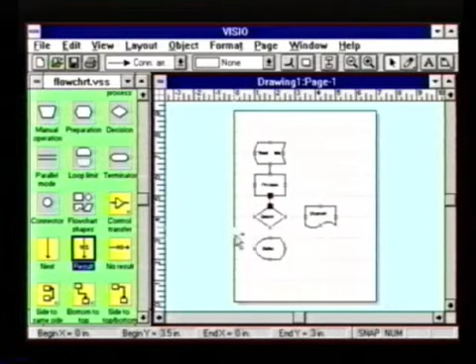I use the same technique to drag connector lines between the shapes. When I drag a connector over, it snaps to a shape, but more importantly, it glues to the shape. So if I move it, the connector moves with it. I don't have to redraw the line.

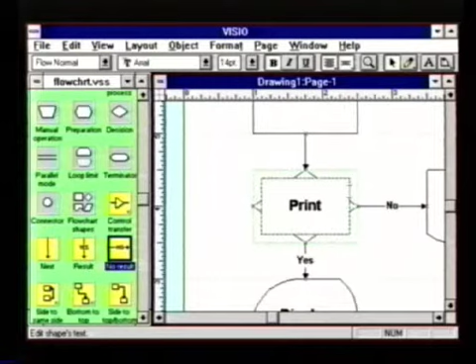Let's zoom in on the decision diamond by clicking on it and using the zoom button on the toolbar. To add text, I simply start typing. To do this with many other products, you have to use a separate text tool, create a separate text block, and then combine it with whatever shapes you had there. But with Visio, it's intuitive.

You don't change tools, don't hold down modifier keys, you just click and type. And when you're typing, the toolbar changes to look like that of a typical Windows word processor and provides similar control over text. Well, not only shapes can have text, lines can too. You can see coming out of our decision diamond we have connectors with text. Just clicking the item and typing works for a connector, just like it works for a shape. I'll just quickly finish this up.

The Visio developers wanted to free you from the complicated process of changing tools or modes. You don't have to go to a separate text tool to enter text. You don't have to go to a separate drag tool or draw tool to move shapes. This consistency of operation is one of Visio's strongest points.

There, my drawing's done, but I really haven't drawn anything. I've just dragged and dropped these shapes onto the page. You may be wondering, can you really draw with Visio? Well, of course you can. Up on Visio's toolbar, we have a straightforward set of drawing tools.

Let me take the line tool. I use the same tool to draw a straight line or a polyline, or if I keep going, a polygon. In this case, I'm drawing a big bold arrow. It's too big, so let's resize it.

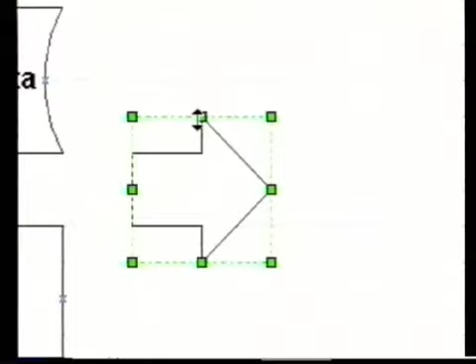Here's a problem you run into with most drawing products. When you draw polygons, they behave like boxes with 8 sizing handles. This is not always useful. But with Visio, I can take any object and make it not behave like a box, but instead behave like a line. And when it behaves like a line, I can use it like a connector, including the glue feature we mentioned earlier.

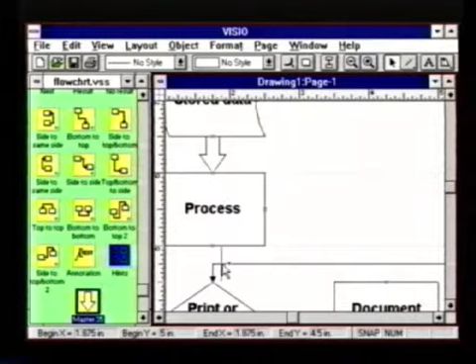Having drawn that arrow once, I don't want to draw it again, so I can drag it back over to the stencil. Draw it once, use it over and over again. That really saves time. Here's another way Visio is easy to use.

On a recent trip to Washington, D.C., I started making an organization chart of the President's Cabinet. You might not buy Visio specifically to do organization charts, but then you find you want to create one. Visio lets you quickly create that chart using the same drag and drop technique we used with the flow chart.

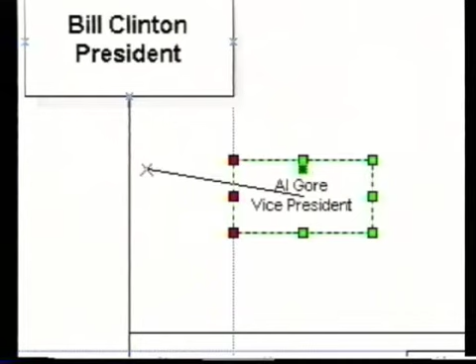You may have noticed I didn't use separate connectors. Instead, I dragged a connector out of the shape using these green and gray boxes we call control handles. Control handles are hotspots attached to shapes that make them more flexible and useful. The org chart shapes, like all of the shapes that come with Visio, are more than just dumb clip art. We call them smart shapes. Visio's flexibility lets you easily keep up with dynamic situations.

Here are some flowcharts and org charts easily created with Visio.

So I succeeded in making Visio easy to use with drag and drop, click and type, consistency of use, and smart shapes that behave the way you expect. But don't just take our word for it. Here's what some users have had to say about Visio. John Shulo of Northeast Utilities said, Visio's strongest point is its ease of use. Industry analyst Andy Seybold said, I have never seen this much power and diversity incorporated into one so easy-to-use package. But ease of use was only one of the three challenges.

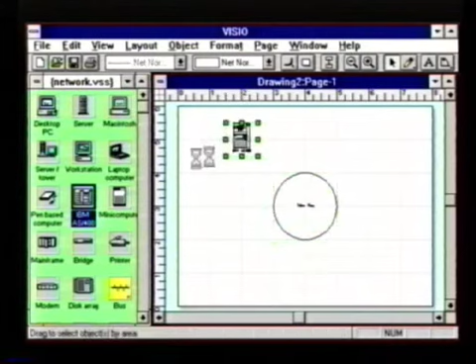The second challenge was breadth. To be truly useful, Visio had to easily create a range of business drawings. We gave Visio breadth by creating a graphics engine capable of addressing the needs of a range of drawing and diagramming types. A network diagram is a good example of breadth because a number of our customers tell us they were a real problem before Visio. To create drawings like this, you had to use a hodgepodge of graphics programs, CAD programs, illustration programs, specialty tools, even presentation products, whatever could be pressed into service, often with time-consuming, frustrating, and unsatisfactory results.

But with Visio's powerful engine, you use the same procedures to create a network diagram as you use to create an org chart. And like those pull-out connectors we used in the org chart, we have pull-out connectors in the token ring symbol. And of course, they stay glued to the shapes. So if I move my server shape, everything stays connected.

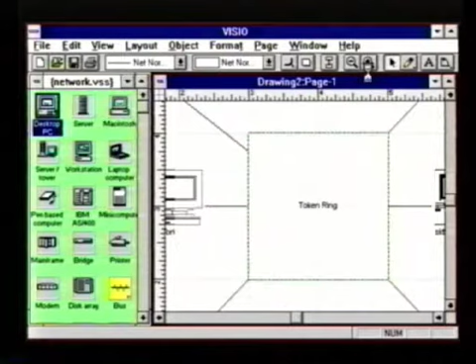With Visio, you use just one application to create multiple drawing types. You know the advantage of supporting one graphics product throughout a company. You're not supporting a flow charter here, an org charter there, a space planner here, and so on. Visio is a great value when compared to the alternatives. Visio is easier to learn and does more types of drawings. Plus, because Visio is targeted at broad, mainstream usage, we made it inexpensive.

Finished. Here are a couple examples of network diagrams created with Visio.

What if you want to take on a task that seems very different, a measured office layout? Well, if you've already created a Visio drawing, such as a flowchart or a network diagram, you already know how to make an office layout. Let's start by setting out the walls of the office. You can see that our rulers are marked off in feet and inches. It could as easily be centimeters or meters. As I size shapes, there's a readout of their dimension at the bottom of the window.

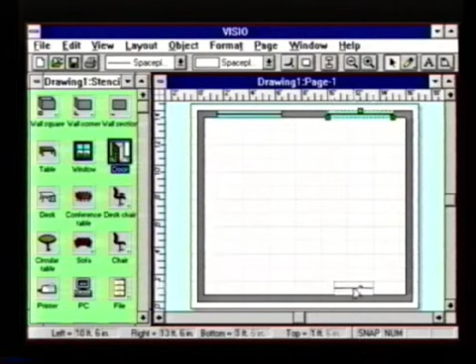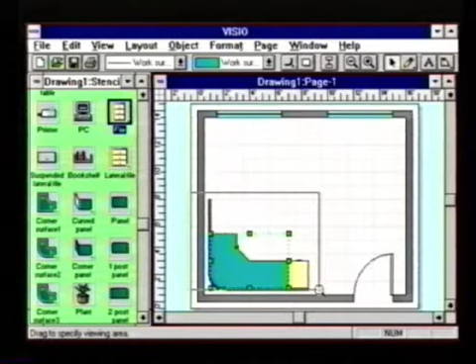Now, to accurately determine how many workstations we can put in this office, the application must work with the real sizes of objects. Visio has that capability. For example, this drawing is set up with a scale of 1/4 inch equals 1 foot. When I drag and drop Visio shapes into this drawing, they are the correct size at that scale. This is a Visio feature usually only available in complex CAD systems, but you don't find it in illustration programs or specialty flow charting tools or org charting programs or products like them.

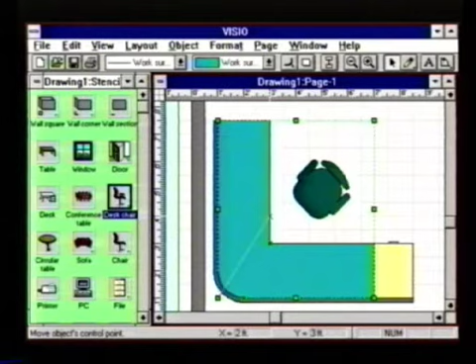We've seen smart shapes before. Here, when I stretch the desk, it doesn't distort. It knows I want to extend the return and not widen the entire piece. In other words, it behaves the way I expect. I can just grab this control handle and change the desk from having a keyboard tray to not having one at all. And here, the control handle pulls out the drawer of the file cabinet to make sure I've left enough room.

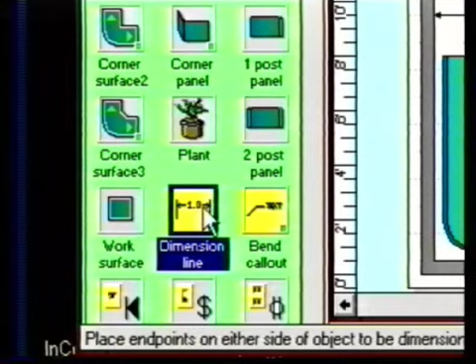In making drawing easy, we don't think it's an issue of how much dumb clip art you have, but how few smart shapes you need. Now, no measured drawing would be complete unless it could do measurements, and Visio can. And no office would be complete without a plant, and Visio can do that too.

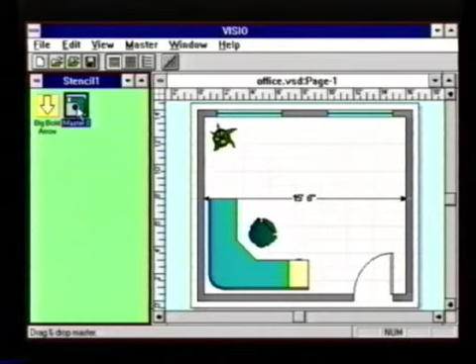Space planning is just one of the 20 general business stencils that come with Visio. But if your needs are more specialized, for example, electrical engineering, or chemistry, or biotechnology, or even law enforcement, we have additional stencils available. But what if you need shapes specific to your organization? Just make your own stencil. I demonstrated before how you can drag a shape over to the stencil and then use it over and over again. You can create your own stencils of shapes from scratch or modify the Visio shapes that come with the package. You don't have to wait for an upgrade from us to grow. Visio is open for you to customize to your own needs.

So we met the breadth challenge by providing an engine that supports a range of job-specific templates and custom templates created by you. But there was still one more challenge left to meet.

We're wearing sunglasses here because we need to hide from our marketing people. They tell us never to demo the hidden part of Visio, its power.

It's true, most users will never use this part of Visio, but it's the power under the hood that enables it to grow with you and integrate well with your other Windows applications.

Remember the arrow we drew earlier? If I stretch that arrow, the arrowhead distorts. It's dumb. But I can make that arrow smart, so if I stretch it, the arrowhead stays well proportioned.

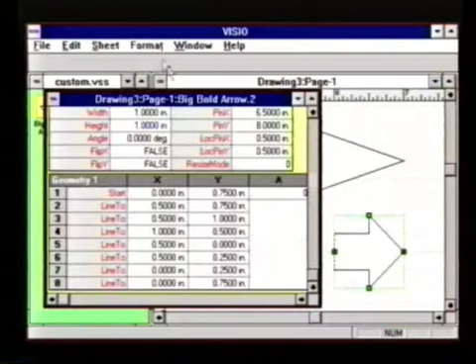To provide this capability, under every shape is a shape sheet, a spreadsheet that's not just a table of values, but a table of formulas. I'm going to change a few formulas to make this arrow smart.

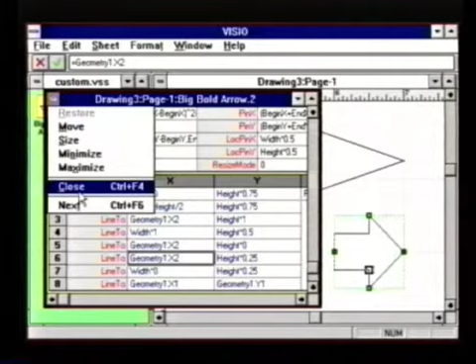You don't have to do this because the shapes that come with Visio are already smart. But if you're an advanced user, this capability is open to you. There's nothing hidden from you back here in Seattle. Now when I stretch this smart arrow, the arrowhead remains balanced.

Visio's power under the hood also includes full support for Microsoft's Object Linking and Embedding Technology, or OLE. This lets you easily incorporate Visio drawings into the documents you create every day.

We set Visio aside for a moment and moved over to Microsoft Word 6.0. I've opened a Word document into which I want to incorporate an org chart. You've heard us talk about drag and drop in Visio, but check this out. With OLE 2.0, we can just drag the entire org chart out of the Visio window and drop it into the Word document. That's seamless integration.

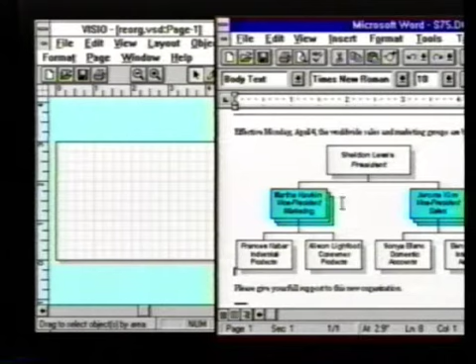And if I need to make a change in the org chart, I can simply double-click on it and Visio becomes active in place. Yes, the title bar still says Word, and you can see the text of my memo here, but what I've got are the Visio menus, the Visio toolbar, and the Visio rulers and grid. I can change the color of a shape, and if the text is wrong, I can change that too.

You can modify your drawings in context, in Word, without going to a separate window. This is called in-place editing. It's a feature of the new Microsoft Office applications, as well as Visio. Visio was one of the first programs to support this new technology, which allows you to easily incorporate Visio drawings in your word processing, spreadsheet, or presentation documents.

InfoWorld summed it up: Visio incorporates a smooth operating interface, well-implemented smart connectors, and tight object linking and embedding 2.0 integration with other applications. Templates cover a broad range and are of high quality. That's why we received InfoWorld's Product of the Year award in the broad category of presentation and graphics tools.

So Visio's strength under the hood met the last challenge: power. It's this power that makes Visio easy to use and gives it the breadth to handle a wide variety of drawing types. Visio can grow with you and integrate well with the other Windows applications you already use.